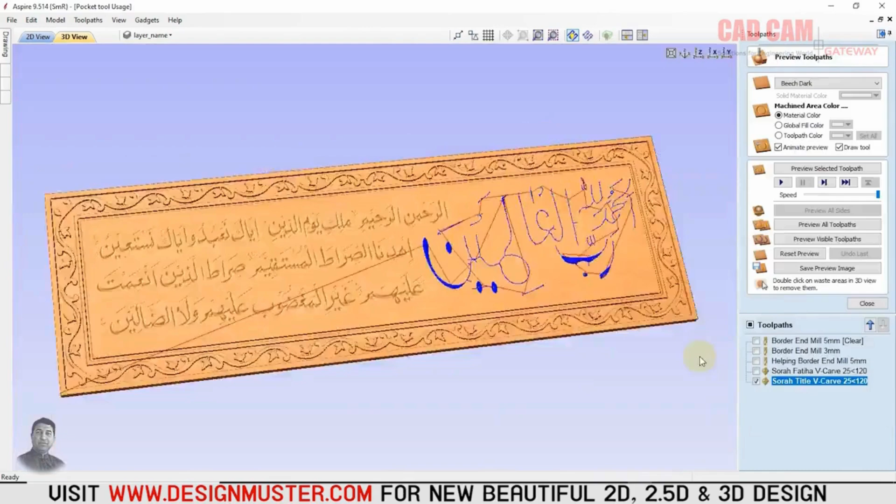Today's tutorial is especially about tools: how to set up a tool in Aspire, whether it's any design, writing, or anything else you want to cut. How do you select the right tool for it? How do you choose the tool? How do we set the size? How do we set the feed rate? What should the spindle speed be? We're going to discuss all these things now.

Here I have opened a frame. In this frame, as you can see, first of all there's a border on the outer side. After the border, Surah Fatiha is written inside. Some words from Surah Fatiha are used as a title at the beginning. So now this entire design, this whole inscription, we have to...

What will be the function of this? The wooden sheet we've placed on the outside — look here, there's a cutting border, meaning a cutting edge has been made. This is where we'll cut the entire sheet to give it the final size. After that, these few lines here are being used as a border.

Let me give you a suggestion here: when designing, always maintain the layers. It will make the work easier, the programming easier, and moving forward.

After that, look here. There's another border placed, and then the first few letters of Surah Fatiha are used here as a title. After that, the rest of the surah is written here in full. The way we're arranging this is that first of all, we need to see that this area of the outer border will be made deeper, while this raised part will remain elevated.

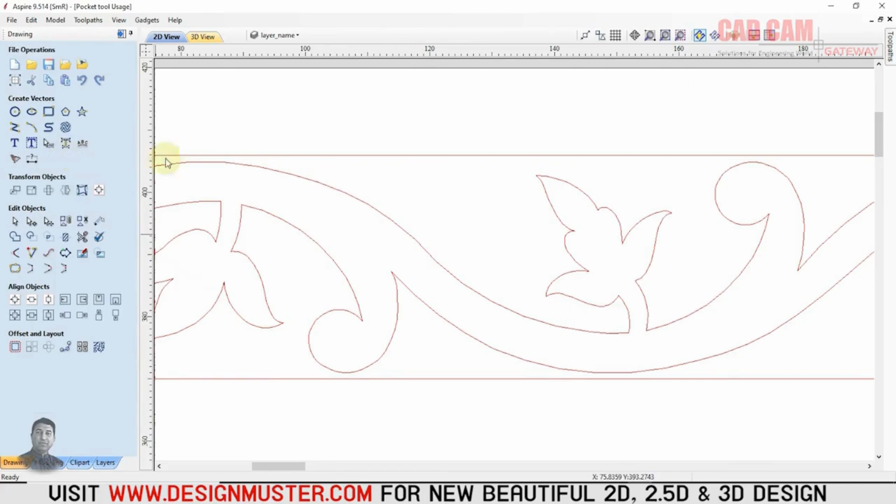This particular section is indeed the narrowest area of the entire design, which measures just 1 tiny millimeter. Now look closely, I'm about to tell you something incredibly important and absolutely crucial for your understanding. Whenever you meticulously design any object or component, you truly need to always keep in mind that there should be at least a sufficient and adequate amount of area for the manufacturing tool to comfortably pass through without any obstruction. Usually when we're in the process of designing, we often don't pay sufficient attention to these critical details at all.

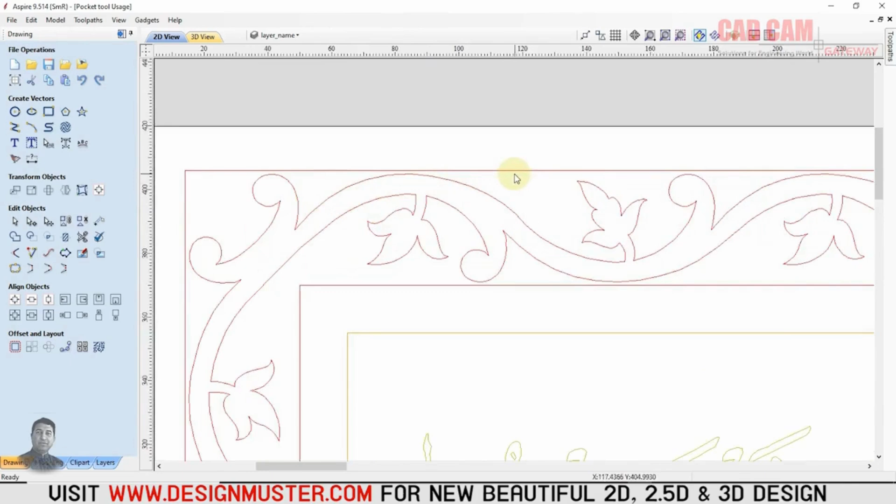I'm carefully selecting the specific border and am now going to apply the offset function. Here, I set it to 3, watch this, and delete original. And on the outer side, I moved it 3 millimeters out, offsetting it. I selected it like this, did an inside offset, and deleted the original.

Now look, what happened is that there's space left on the sides, and I'll have to select both lines again and move them. Now I already have a layer with border depth 4. I moved it into that layer, and this way we got a bit more space. Now, why did I do this? You'll understand this as we go further.

One thing is clear, we need at least a 3 or 4 millimeter cutter here, or a 1/8 cutter, to clear this area. After that, if we go further, what do we need to do?

As soon as I activate the toolpath at this spot, watch this. I said that we need to clear out these areas, so for that, we have the pocket toolpath available here. As soon as we go to the pocket toolpath, the first thing to do is set its depth. Let's set it to 4 millimeters.

After that, select the tool. You can see that a 4 millimeter tool is already selected here. This is an end mill. Make sure you're in the metric system and select the 4 millimeter tool.

Now about this pass depth, since it's customizable, we've set it up according to our own preferences. But the standard recommendation is to set it to half the tool's diameter. Now, when it comes to wood, it's often said that you should set the pass depth to at least equal to the tool's diameter. Here, our local practice depends on a few things: what material you have, which tool you're using, and what kind of machine you have. That's your own practice, and you can even go deeper if you want. But in any case, the best practice is...

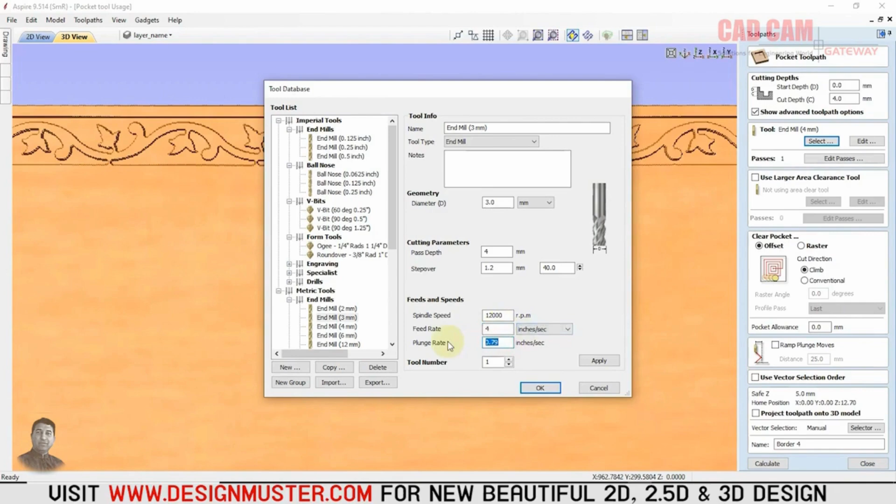Let's increase its speed a bit. I'll take it to 16,000 RPM. After applying, I clicked OK. Now see, it's done.

Let me go back to the programming. Look, here we set the tool to 3 millimeters. Now here we have an option, Use Larger Area Clearance Tool. Turn this on so that for the larger areas I'm selecting and assigning a 6 millimeter tool. I've set the tool to 6 millimeters.

In past steps, I set the step over to 40%. Here, I set the RPM to 14,000. When you come here with inches, you'll see that since the tool is bigger, we still have to adjust the feed rate a little. So here, I am adjusting its feed. I keep it at 4 here and set it to 0.8, apply it, and click OK.

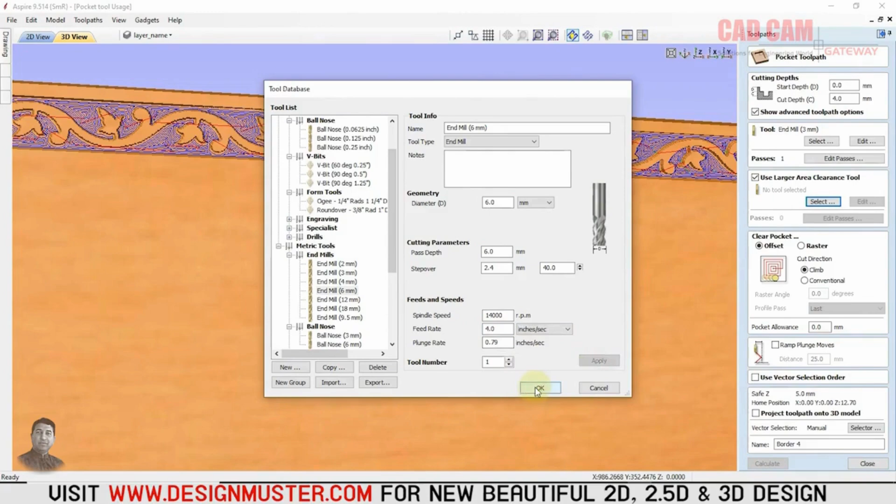Now look, we've used two tools in one program. One is 3 millimeters and the other is 6 millimeters. So as soon as you calculate after doing this process, everything else remains as it is. Now look, the toolpaths are done here. When I reset and view it, you can see the work is the same as what we did before, so what exactly is the fundamental difference we are observing here?

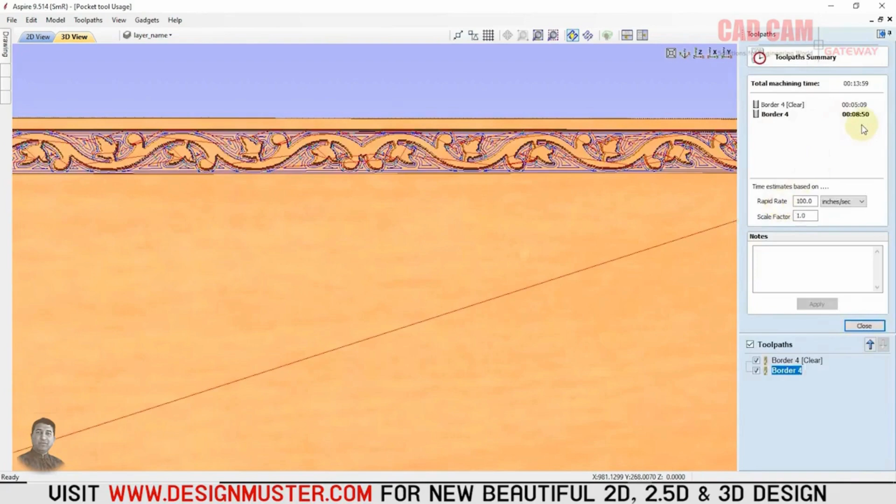The larger open areas will be handled by the bigger tool. This is the toolpath summary. Look, it created separate programs for this and that. The difference: larger open areas cut with the bigger tool, smaller areas with the smaller tool for better quality.

Overall, the total estimated time is now 14 minutes, whereas before it was 11 minutes. You're seeing this correctly. This difference has come up here. Why did this difference occur? Because the tool was changed, right? Now there will be a slight difference between the speed of the bigger tool and the other one.

But the most important thing to notice here is that the tool was set according to your requirement. Instead of clearing everything with a 3 millimeter tool over and over, now a bigger tool was used, and it did the same job faster. Look, it cleared this area in 5 minutes, and the finer area took 8 minutes, or actually 9 minutes.

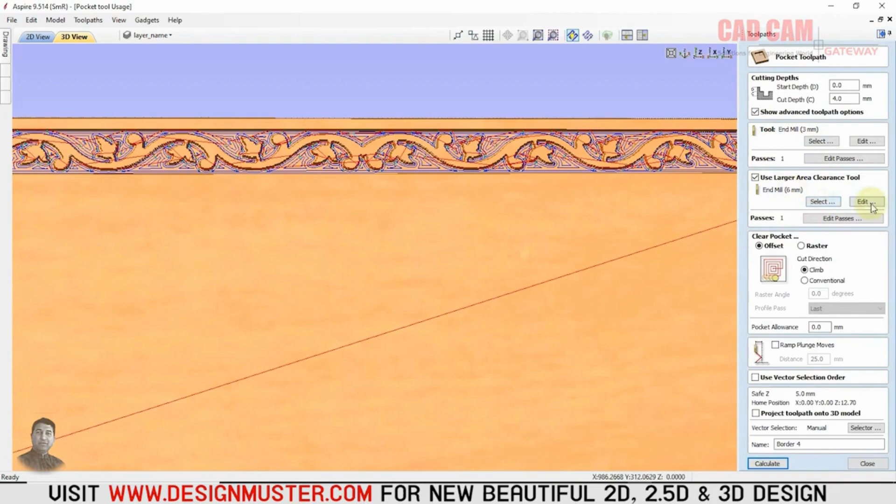Now, let's experiment. Here we had used a 3 millimeter tool, and from above we used a 6 millimeter one. Now, instead of 6, if I change the tool to 5 millimeters here, let's calculate it. After recalculating, I reset the preview, previewed all, and now let's look at the time summary. So now, see, the total time has come down to 9 minutes.

What happened here is that the tool got smaller than before. First, we used a 3 millimeter tool, so it took 11 minutes. Then when we used a 6 millimeter tool along with the 3 millimeter, it went up to 13 or 14 minutes. When we used a 3 millimeter tool and a 5 millimeter tool, the time came down to 9 minutes. What's the reason for this? It's very simple. The bigger the tool you use, the less work the smaller tool has to do.

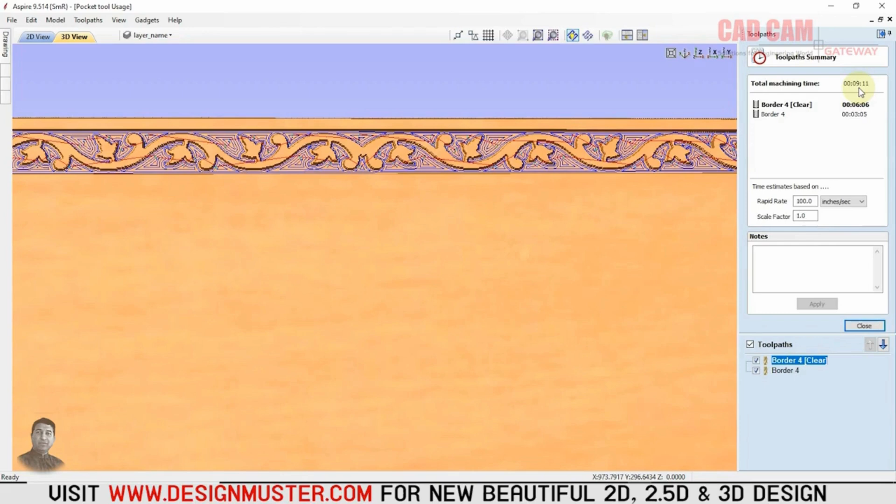So using a slightly bigger tool, like I went from 3 to 5 millimeters, or earlier from 3 to 6, this is the difference you'll see. Why does this difference happen? Let's zoom in on an area. When the tool comes into this pocket for cutting, you can see that with the 3 millimeter tool, it has done this cutting from the outside, and then after cutting with the 3 millimeter tool,

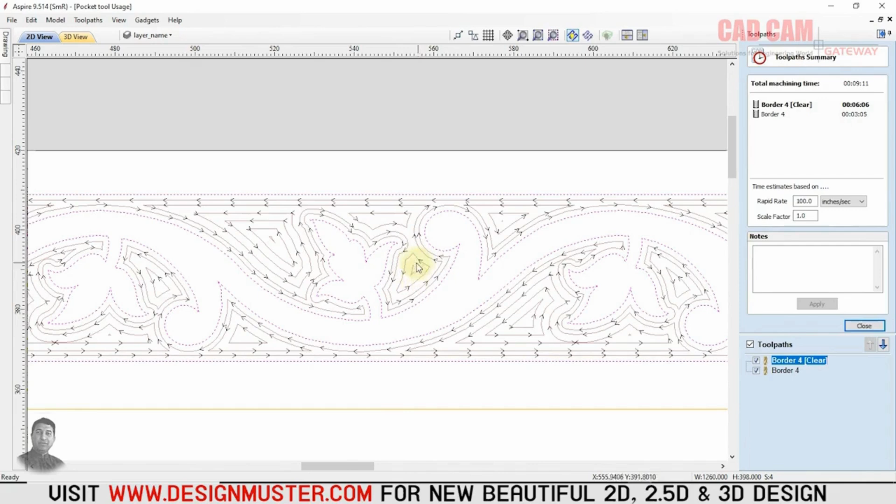it cut this area twice, whereas on this side the cutter passed once, here and here. These are the cuts made at 5 millimeter intervals. Now, if I had set it to 6 millimeters here, then on this side there would have been only one cut, and the rest would have had to be cleared with the 3 millimeter tool.

Let's practice this a bit more. If I double click here and set this 5 millimeter tool to 8, usually people think, hey, just use an even bigger one.

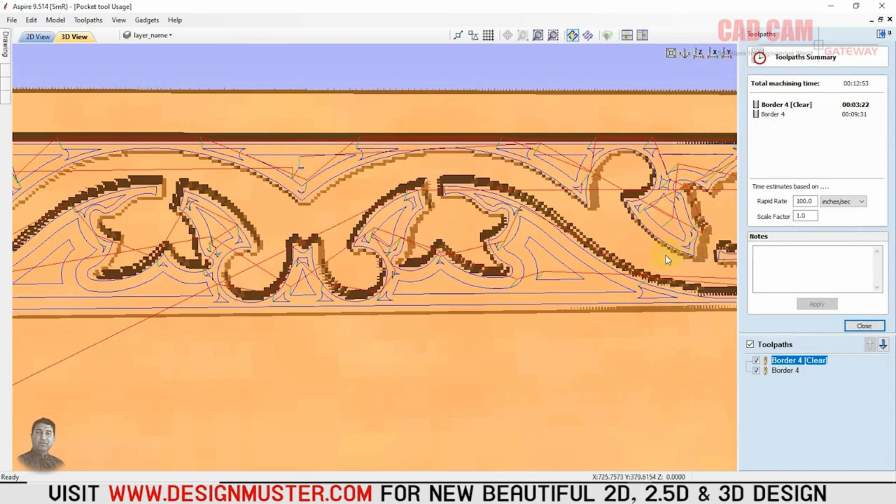See, now it took it back to 12, then went to 13 minutes. The reason for this is that now, look, on this side it only had to make 1 or 2 cuts, but for the rest it has to use the small tool. Here you can see the workload for the small tool has increased. That means when you use a bigger tool, the small pockets that are created require more work from the smaller tool. See, now the small tool is working here, here, here, and here as well.

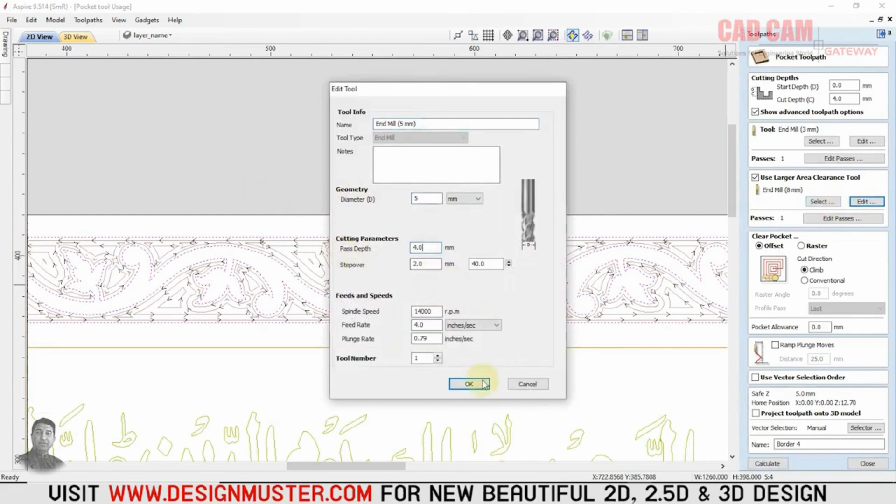Choose tools carefully. Oversized ones burden smaller tools. Design to minimize closed pockets, using larger tools where possible. For numerous closed pockets, match tools appropriately. I'll adjust this to 5. Here, I'll also reset, preview, and preview all just to take a look, though it's not really necessary, just for the sake of checking. After that, come here and recalculate it. See, it's back to 9 minutes, and this way our file is ready. So up to this point, our first toolpath is complete. I'll view the tool now.

After this, what we need to do is, on the inside, we've created a groove. Now, how exactly do you intend to create this groove? Are you considering performing this operation using the metric system, in millimeters, or would you prefer the imperial system, working in inches? The decision rests with you, based on your project's requirements and personal preference. Here, observe closely. It provides the tool necessary for this task.

So let's add a new cutter here. Here you'll select the end mill, and I've entered 5 millimeters here. I set its pass depth to 4, set it to 40%, set it to 14,000 RPM, and set inches per second to 4. All these values are now okay. I've selected it with the 5 millimeter. This 5 millimeter cutter is now applied here, and I want to keep it out.

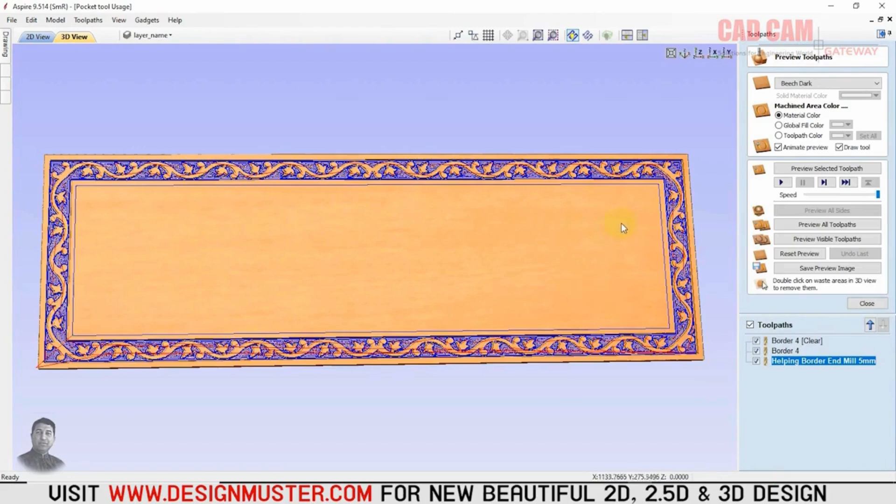And along with that, I'm also writing 5 millimeters end mill 5, so that I have a reference saved. Calculate this. As soon as I calculate it, look, it's done. Reset, preview, and preview all to check. First the outer one, then it has given a border on the inside. See, it's done, okay? This border has appeared. Close it. Up to this point, keep saving the file as you go. Switch to 2D view. Now see, our work up to here is done.

Now on the third one, we did this in the first process. Now in this one, look, 2 tools are being used for clearing. A 5 millimeter one. You can also rename it from here. I wrote border end mill 5 millimeter. Let's rename the border to end mill 3 millimeter so that we can keep track of all the tools as well. So when we install these tools, this work will also be done. Next, we have to work on the Surah Fatiha that is written here, and we have to make it with a V-bit.

And for the V-bit, observe here, we have this V-bit available. The most important thing is to select its tool. As soon as we go to the V-bit in the tool section, we see that only 3 V-bits are available here. If I switch to the metric system, there are also just 3 here. So I'll create a new tool here. I selected the V-bit, and I'll set its diameter to 25 millimeters. And here, I'll set the degree to 120.